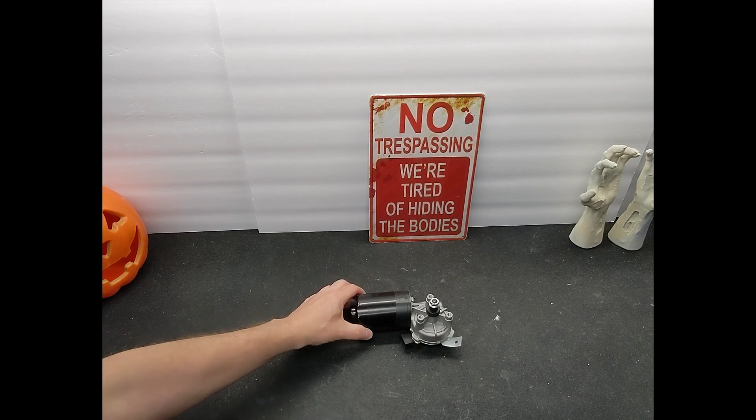The most popular motor for people is this big guy. It's a windscreen wiper motor that you'd get in a car. Put simply, you've got a massive great motor here and then a reduction gearbox inside this piece. You can then get a connection onto the end of it, put an arm on, bolt it down and control it via these little terminals.

You have a slow speed, a fast speed, and usually a switch which allows you to wire it up so it will do one rotation and stop until the switch is toggled, then it's 1 rotation and stop. Pretty big, pretty beefy, good for moving heavy things, lots of torque, lots of power. At 12 volts this thing has a stall current of something like 10 amps - that's a lot of power.

The other type of motor I've played with is this. This is from a kid's car, like one of the ride-on ones that they sit on. This is actually a pretty reasonable motor. It's an RS550, rated 12 volts.

You can see there's a gear chain in here to reduce it. It still runs pretty fast, similar sort of speed to the wiper motor. The difficulty with it is it's quite difficult to mount - you've got 2 wings here basically all you've got, and the whole thing's very wobbly. It's all plastic gears, so unless you're careful, the whole thing can wobble about as it rotates. But that is a possibility.

They will also run at much lower voltages, where they'll run at slower speeds, and that is actually true of the wiper motor as well. You can run these things down if you've got a variable voltage drive for them, so you can actually change the speeds, and that's something you can't really do with the AC synchronous motor. Very difficult to do, so you're stuck with whatever it gives you.

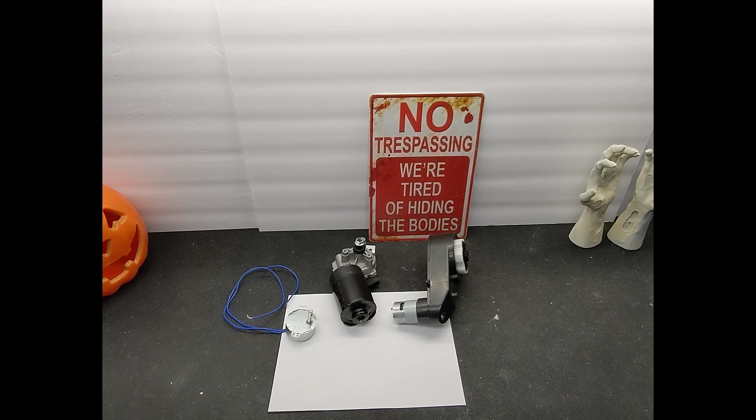The other thing to look at here, of course, is price. Very different in prices. You've got the synchronous motor - you buy them in a handful, they're about $4 each at the moment, 2023. If you buy one of these geared motors, you're looking around $9. The wiper motor, you are looking at $25 plus.

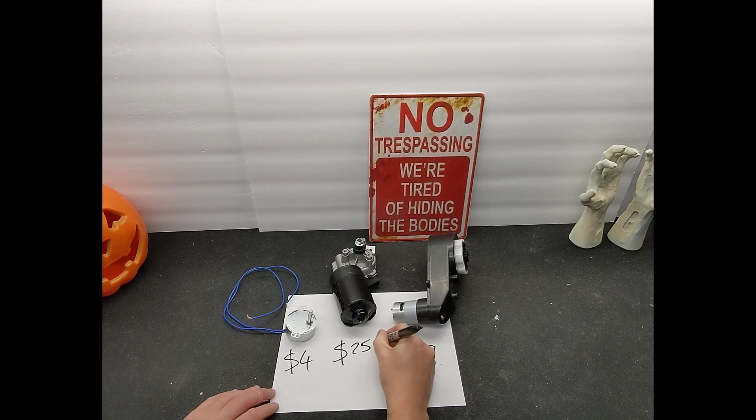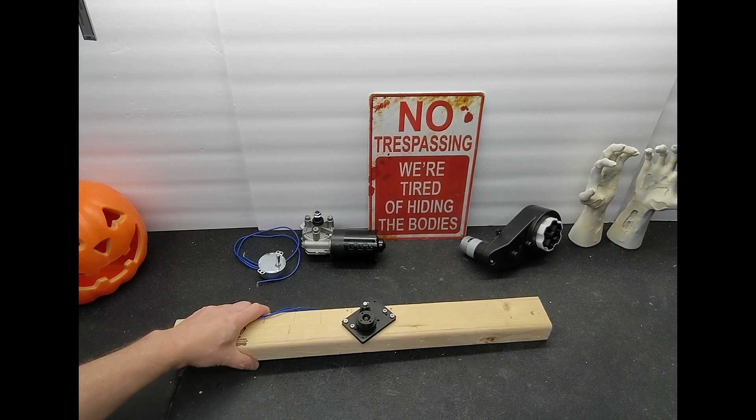What I've been trying to do is use the cheaper motors, these little AC synchronous, and actually use some gears to increase the torque. I've done this on my big fella recently, where I did a 2-to-1 ratio to allow him to turn. This one is also a 2-to-1 ratio - there's 15 teeth on this cog, 30 teeth on this one, so you're halving your speed but doubling your torque. All these 3 pieces are 3D printed. You've basically got this one, very hard to turn now at standstill.

You've also got on this 3D print an extra little hole here. This allows me to put another lay shaft in here. This cog can go onto that one, and then a different cog with 2 teeth can go on to lower the speed even more and increase the torque even more, and I'll show you that next.

Motors, I've connected them both up to power, just going off to the mains. Big warning, if you're scared of playing with mains electricity and you don't know what you're doing, please don't play with it. It's definitely not down to me if you go along and electrocute yourself.

So all I've done here is I've wired a standard motor and a double geared motor to the power, just to show you the difference. Put the power on, you see 5 or 6 revolutions per minute for this guy, pretty slow, but look how slow that is, absolutely monstrous.

I think it's about 6 times, if my calculation is right - 2 to 1, 3 to 1, 6 to 1. So this is about 1 RPM, I think, and you can see that there aren't going to be that many applications where that's useful, but there may be the odd one.

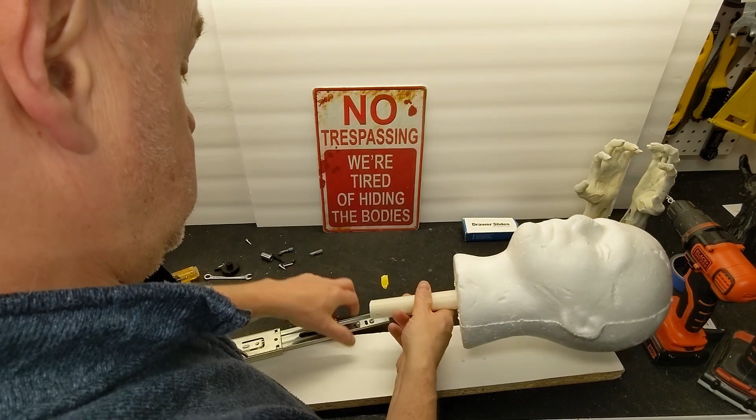So we're going to just turn that around, I think. Let's try that again, the other way. I wrestle this through. Again, it's not too scientific. Line the two holes up. Put a couple of pilots in.

Okay, quick mistake fixed. So now he should be sliding the right way. The next thing to do is get a piece of wood, bolt it to the wood, and then see how that fits into the box.

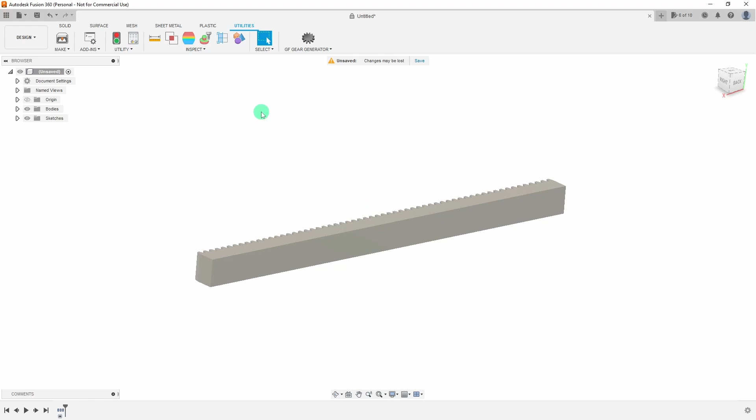Very quick, creates a rack. Just double checking the length of the thing, 220 something millimeters, just the right length. Next thing we need to do is put our mounting holes on the back.

So I'm going to open up a sketch on the back face of the thing. Going to zoom in a bit. Going to put a circle. Want to make sure it's in the center. Making sure I find the center point there.

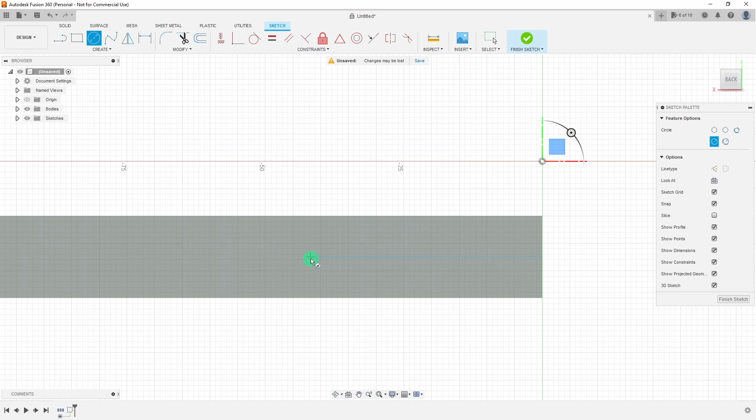If you go down the edge of a sketch object, by default you get a little blue dotted line. Put a thing in, putting in a size I can put a self-tapping screw, and I'm constraining the measurement to match how far I need the piece away, the hole away from the end of the piece.

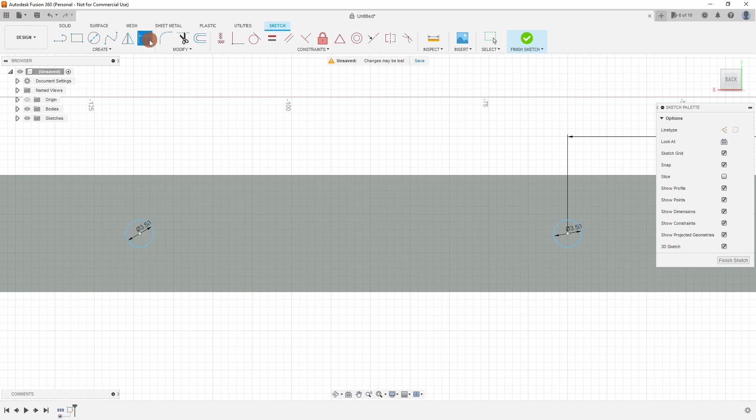And then there was a second hole, which again is going to give me a little blue line. It's going to go out to the middle. And then just type in the dimension, the hole, and the separation again.

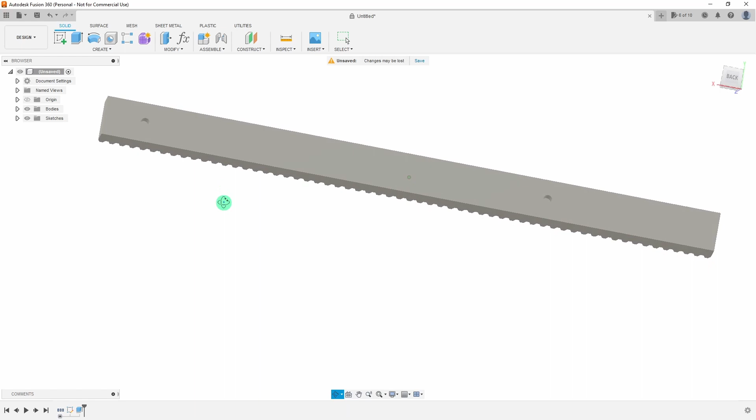So now you've got your two sketch hole positions on the back. Select them both and extrude them to make holes to put screws into. Now I'm not going all the way through because obviously that would mean they would pop out top of the rack, but they're deep enough to get a decent sized screw in the back of.

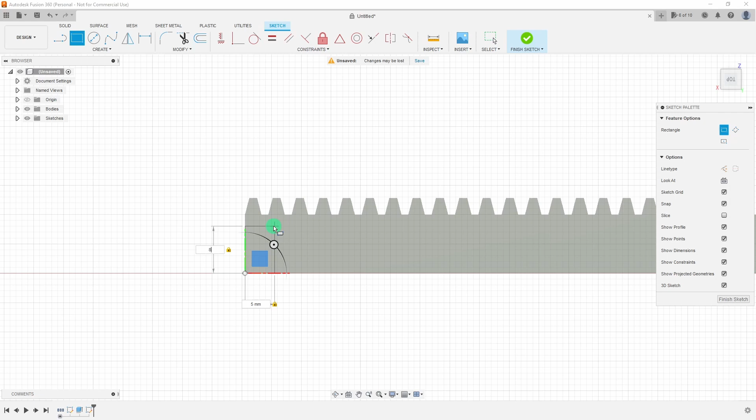The other thing that might be worth doing is to put some sort of end piece on, just to allow a switch or something like that to go. May not need to do that in the final one, but it isn't really going to cost anything.

So I've just drawn a shape on the one face, extruded it out, and then just to give it a little bit of extra strength, just going to chamfer those two edges that meet up.

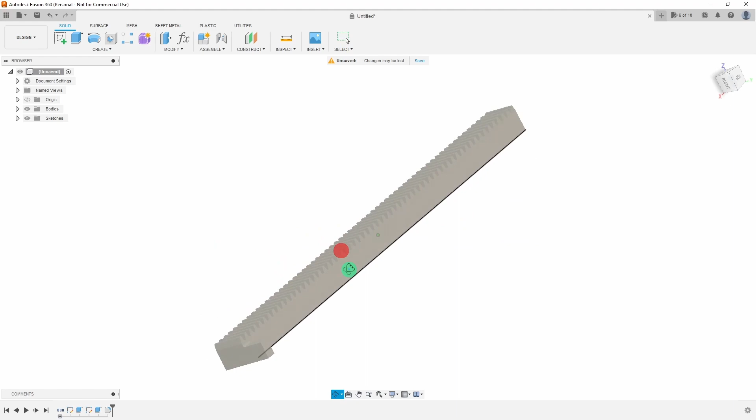So there's the completed rack. It's got holes on the bottom, a little bit on the side. We're going to pull that through to the 3D printing software.

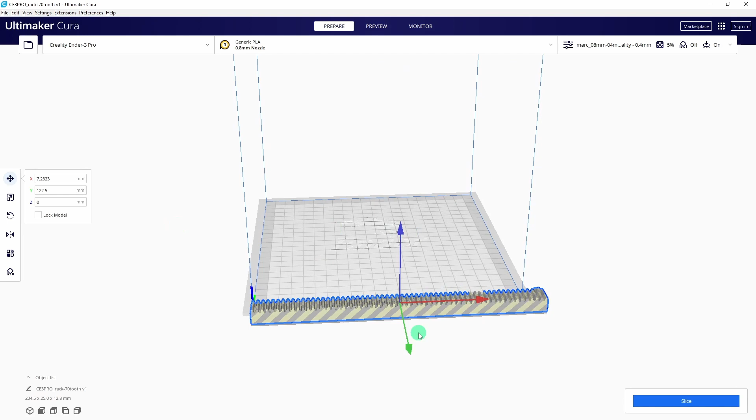So we export the rack. Here we are into Cura. That's the normal slicer I use for the FDM printer. First thing I'm going to do is just put it on the bed, rotate it around so it will fit, because it is 230 millimeters long. That's in a good location.

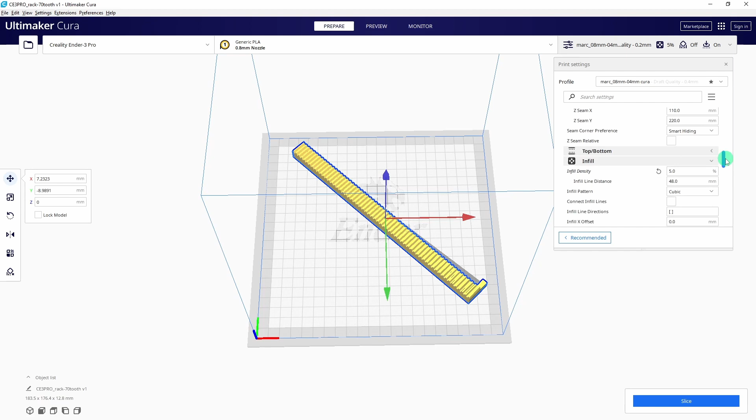I'm using a 0.8 millimeter nozzle, which allows me to go down to 0.2 millimeter print or up to 0.4 if I don't need it to look too pretty. I'm going to go 0.2, and I'm also going to set the infill to 50, which should give a nice strong design.

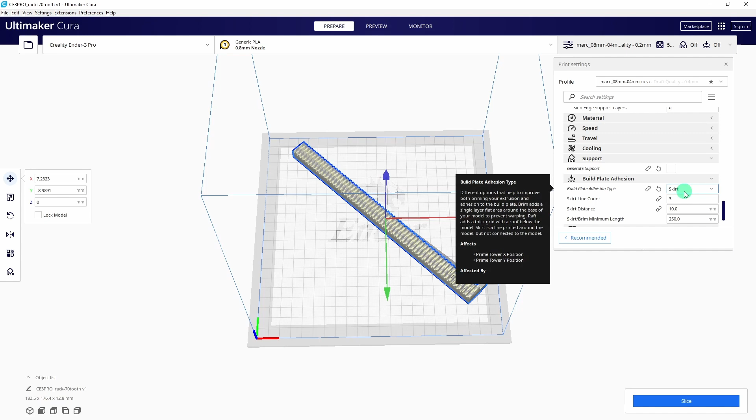Just looking through the rest of the settings. Speed okay, needs to run a bit slower when you're using a bigger nozzle. And supports, we don't need supports. And for this type of thing, we don't really even need any surround, so we're not going to use a skirt or a raft. So there, we're going to just slice it quickly, put it to disk, just have a little look at the layers.

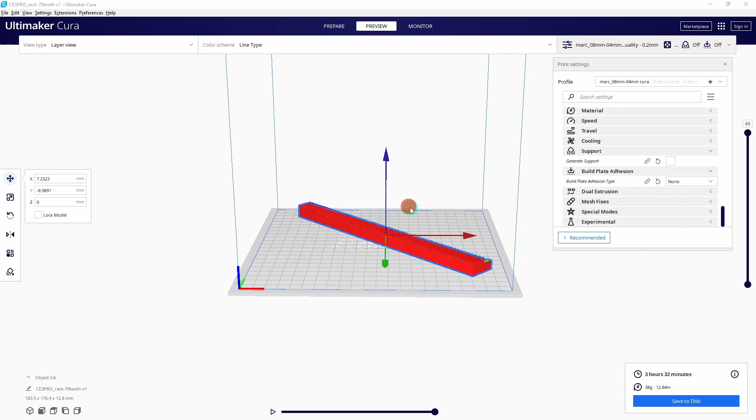You see as we start off from the bottom, it's solid, then it starts to infill. Then you start to get your solids in the top surface. You've got several layers of solid plastic. It should be nice and strong. Save that to disk, and then we're going to load that up into the 3D printer.

So here we are back at the workbench. Here's our 3D printed piece, came out last night, nice and clean. You can see the little mounting hole positions here. Hopefully they line up - one lines up there, one lines up there. So we're just going to extend the head out and put the screws in.

Okay, so the thing's screwed on. Here you see a rack mounted on the slider, going to go up and down with the head. So the next thing to do is look at how to mount a motor to turn a cog to move the rack up and down.

So as a quick proof of concept, took the cog off the geared system I had earlier, wired it up to the switch. You can see it's spinning nice and slow. And if I just manually mesh that with this gear set, you can see that the head is going up as it turns the rack.

Pretty slow. Looks like I can't mount the motor exactly on this flat because it's too tall, doesn't mesh with the rack. But I can just rotate this thing on its mount and find a good point where it will mesh and move the thing.

So rather than go fancy and 3D print, I figured I'd just put a couple of wooden blocks there. Supports the motor pretty securely, and you can see when I turn the power onto it, it's doing its job, it's moving it.